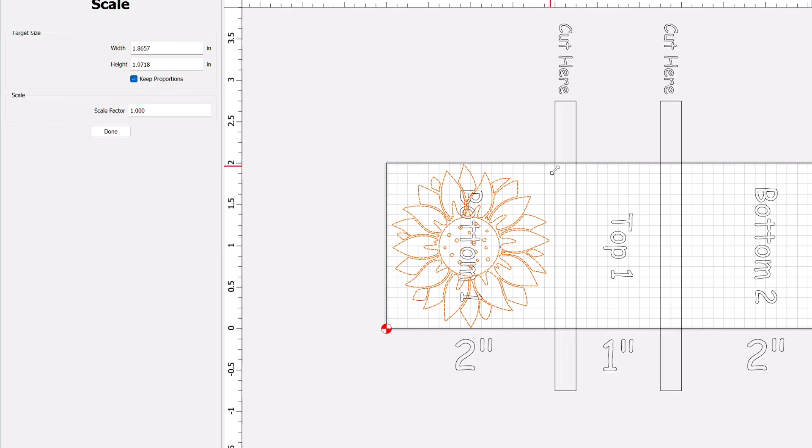I designed this ring box to look like a Zippo lighter. All of its components were carved using my desktop CNC machine, and the sunflower on the front is filled with epoxy resin. It took a few prototypes and a couple hours designing a custom jig to assist with CNC work holding, but in the end, I think it turned out pretty great.

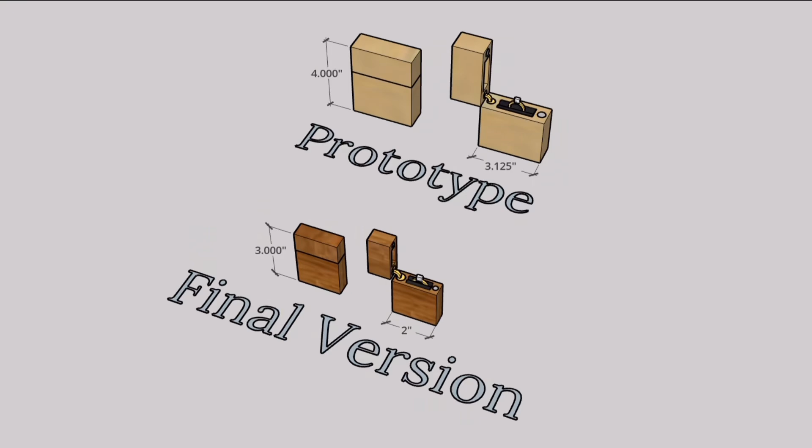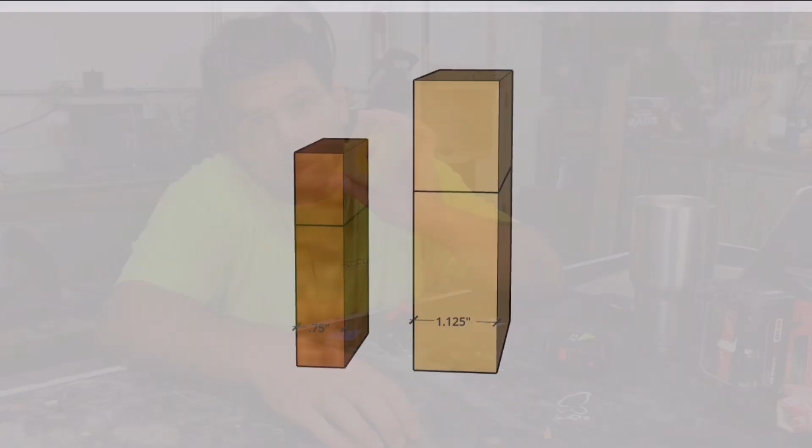Before I start building the final version, I want to show you some of the things I like and dislike about this prototype, starting with a dislike on how big and blocky it is. Here's a 3D rendering showing a side-by-side comparison between the first version and what the final version should end up looking like. Not only will the length and width be much shorter, but its thickness is going to shrink from about 1 1/8 all the way down to just shy of 3/4 inch. That adjustment by itself should make this look a lot more like a lighter.

Another thing that I dislike is how the logo on the front came out. The customer that ordered this asked for a sunflower, but I think that we can make it look a whole lot nicer by using epoxy instead of paint.

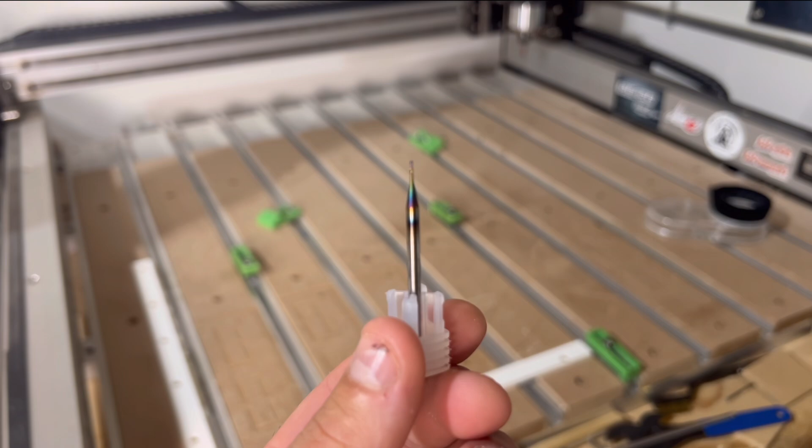Carving small components on a CNC often makes things a little bit more complicated, and since we're shrinking this down, this sunflower is going to be extremely tiny. I didn't even know that they made bits this small, but in order to carve details, I bought this 1/32 inch downcut bit. It's just so tiny.

As for things that I like about this prototype, the magnets and barrel hinges I used seem to work pretty well. The magnets are 10mm in diameter, but for the final version, I'll shrink them down to 6mm to account for the change in thickness. The barrel hinges I'll keep the same, but I'll need to make some adjustments to the size of the hole they slide into just to make sure that it's a tight fit.

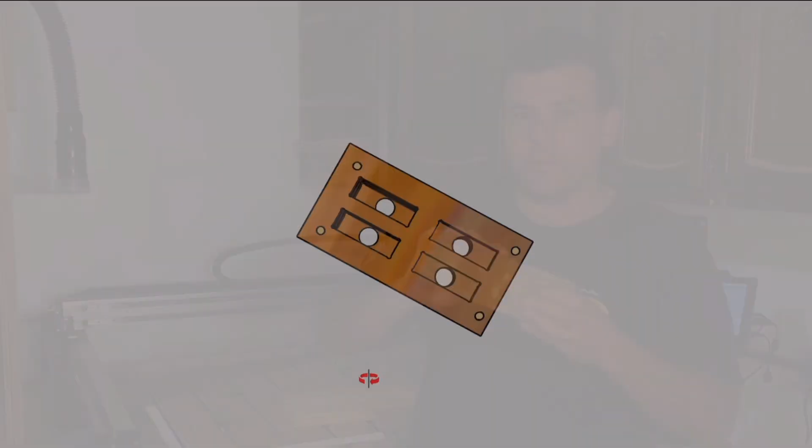With my design settled, I can now get started on making the new jig that will assist with work holding. This jig has 2 holes in the top, one for each side of the ring box, but the new version will have 4 holes, allowing me to make 2 boxes at once. This just makes things a bit more efficient if you ever decide to make more of these down the road. If you wanted to, you could totally scale that up and make as many of these at once as you wanted, but I really just don't have a need for it.

After I carve the sunflower and fill it with epoxy, I'll cut my pieces down to size so that they fit perfectly into these holes. That way, when the machine is carving the pockets for the hardware and ring, nothing will move around.

If you look at both sides of this jig, you'll see a small hole on the side. Because it's so tall, the clamps I use to secure things to my wasteboard wouldn't be able to reach the top. Cutting a small pocket out from the side lets me use the clamps I normally would on other CNC projects without making any adjustments.

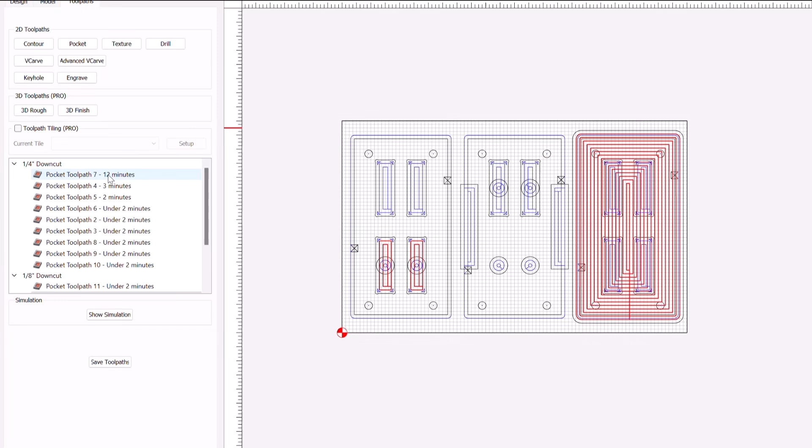In order to make the jig, I milled down this piece of 1-inch pine to 12 by 7.5 inches. The toolpaths that I assigned to carve it are all based on the 3D model that I designed in SketchUp and then exported as a DXF file into Carbide Create. Because my design consists of 3 separate components, I can align them with wooden dowels after they're carved and then glue them together. Carving through 1-inch thick material is much easier than carving through 3-inch material.

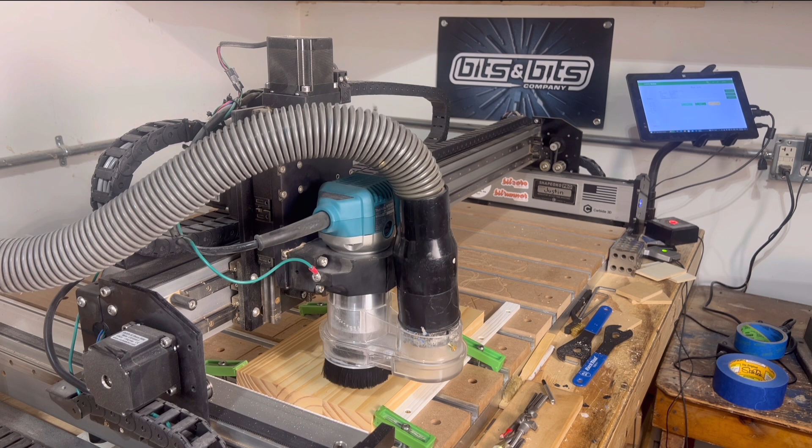Work smarter, not harder. With a 1/4 inch and 1/8 inch downcut bit, I assign a series of pocket and contour toolpaths to machine out all of the components. If you want to know the specific depths, check the free PDF build manual in the link in the video description. After about 45 minutes, I'm ready to move on to the next step of the process.

Once my components are carved, I can remove the tabs using a multi-tool. To glue them together, I just line up the 1/4 inch dowel and hammer them into place.

One note here is that when you clamp them together, make sure to clean up any glue squeeze out, because if it's inside the holes, it's going to affect the ability of the components to be secured there later on.

With the glue dry, I went ahead and flush cut my dowels and tabs, making sure that all 4 sides of this jig are perfectly straight, because we need to align it up to the CNC later, and that's extremely important.

I also used some 120 grit sandpaper to sand the inside of the pockets just to make sure that our ring box components would slide in a bit easier during the next step. Speaking of, now that this is finished, let's go work on our sunflower.

I already went ahead and cut down this piece of 3/4 inch thick walnut to 6 3/4 inch in length by 2 inches in width. You'll notice that the size of this doesn't quite allow it to fit into our jig, and that's totally on purpose. After we carve our logo and fill it with epoxy, we're going to shave this down so that it becomes a perfect fit.

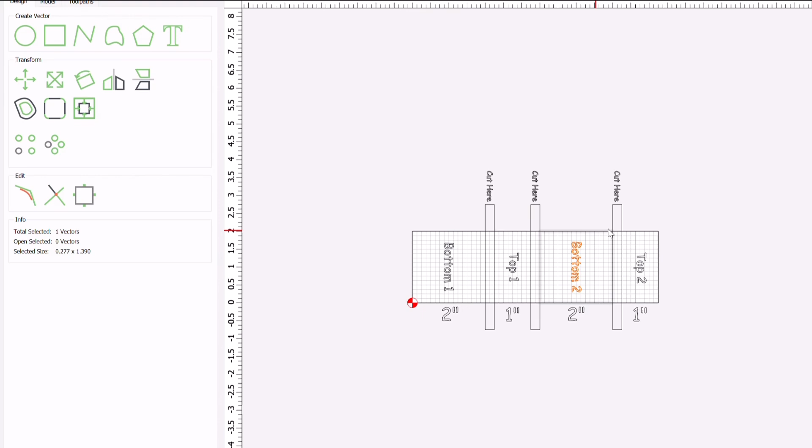Inside Carbide Create, and using the same stock sizes as my piece of walnut, I laid out where my components will eventually be cut from.

Then I imported an SVG of a sunflower that I liked and started to design the toolpaths using a 16th inch downcut bit and that super tiny 1/32 inch bit I mentioned earlier.

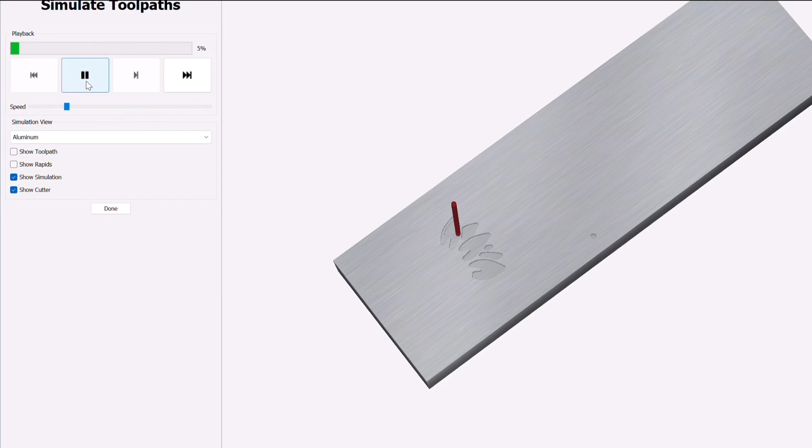The customer also requested a specific date be included, so I added that to the top of the box as well. Both of these toolpaths will be pockets at 0.06 inch depth, but the 16th inch downcut bit should do most of the removing of material, and the 1/32 will just come back after to clean everything up.

I do have to say that I'm pretty nervous about how fragile this is, so let's see how this goes.

I have to say I'm pretty happy with how that bit performed, even if it took a little longer than I may have liked. You probably noticed that on the second box up here I added a rose and a different date. This will be a gift for my wife, so that's our wedding anniversary.

I already went ahead and sprayed a heavy coat of lacquer onto the top of this to help with any bleed out that may happen once I pour my epoxy.

With the lacquer dry, I'm now ready to head to my epoxy station, aka my basement, to start mixing up some colors. I'm using tabletop epoxy from Total Boat, which is a 1-to-1 mix ratio, but just make sure you follow the directions on whatever brand you choose to use.

With my epoxy thoroughly mixed, I then separated it into different solo cups and added color pigment powder to each one to make the colors that I wanted to use for this project. I then used my stir sticks to slowly drizzle the epoxy into the corresponding pockets on our project, which is where you'll start to notice our first mistake.

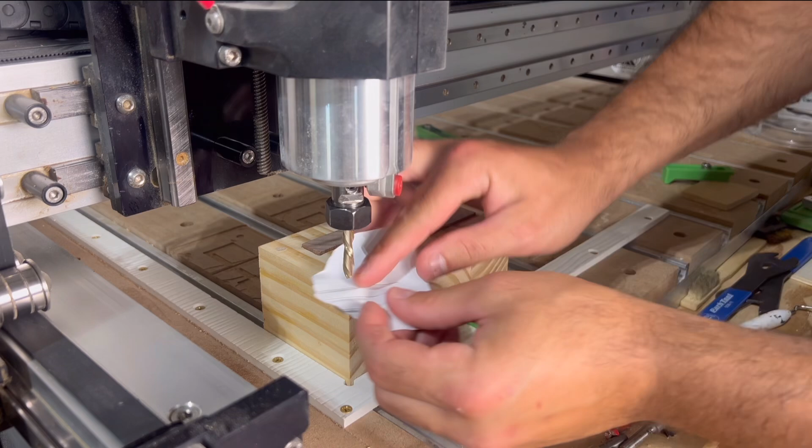I then clamped the jig onto my wasteboard and set the Z0 height using the old school paper method, since the touch probe I normally use wouldn't fit due to the height of the jig.

My X and Y are preset because of the fence that I have on my wasteboard, and I'll link a video right here if you want to see how I made that. They're extremely useful, and I recommend them to everyone that has a hobby CNC machine.

Using a 1/4 inch and 1/8 inch downcut bit, I'll run a quick surfacing toolpath before carving pockets into the top of our components. The measurements for these holes were taken directly from the hardware, so if you decide to make this project, make sure you use the same parts or remeasure your holes.

Once done carving, I popped the components out of the jig by hammering a dowel through the holes in the bottom, and so far everything is looking pretty damn good.

And speaking of things that look good, yes, I got a haircut, and I am ready to show you how to finish these ring boxes.

The first thing I ended up doing was installing my hardware using CA glue for the magnets after making sure the polarity was correct, and then inserting the barrel hinges after lining them up straight and securing them into place using the set screw.

Once the two halves were lined up, I sanded everything up to 320 grit sandpaper and then used a dime to make some rounded corners.

I sanded that material into the right shape using my spindle sander before heading over to my router table to use a 1/8 inch roundover bit to round the edges.